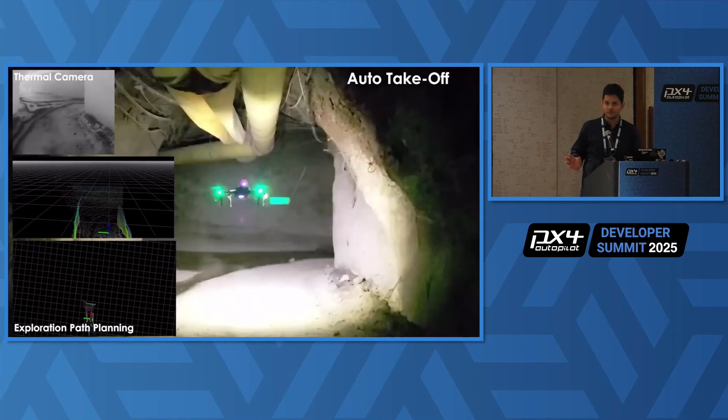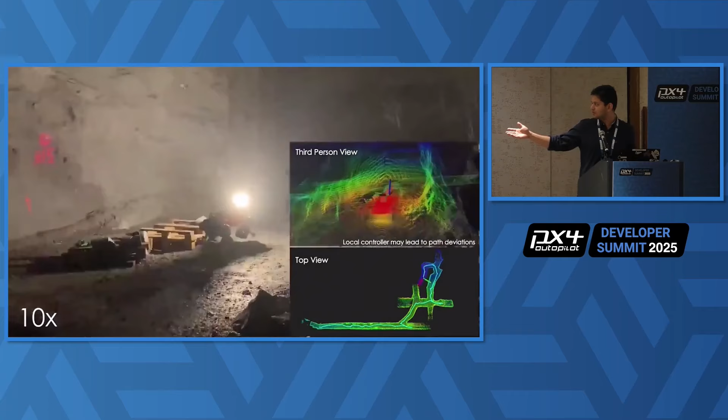And just to motivate the kind of missions that we do and the kind of environments we want to deploy our robots in, these are some representative robot deployments. This is from 2018, where we had a DJI Matrice robot autonomously exploring underground tunnels, caves, mines, essentially GNSS-denied confined environments. This is the same application, but with an ANYmal robot that we had partnered with ETH Zurich for.

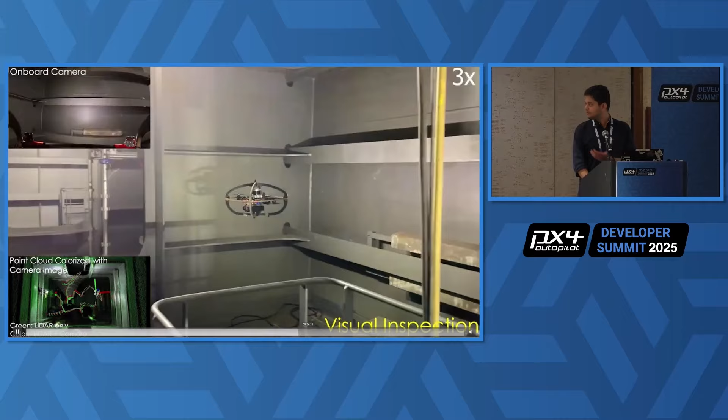So this was research that was done in the context of the DARPA Subterranean Challenge. The clips you see currently are actual deployments from that challenge, which our team won. So these are some of the environments that we care for and we want to operate in and want to develop resilient autonomy for.

And what's the challenge? This is the starting point of my talk. So we worked a lot towards having resilient systems that worked well enough in these environments, but then there were still some problems. They were not sufficiently resilient. What had happened was that the development in this field of autonomy has happened based on the sense-think-act paradigm, where typically you see a compartmentalized development of modules.

Initially there's a SLAM framework which takes in data from the sensors, gets an estimate of where the robot is in the environment, a dense mapping solution that builds representations within which a path planning algorithm then plans what the robot should do next in order to achieve its goal, be it exploration, be it inspection of surfaces, be it any other user defined objective. On the planned path, motion control happens to smoothen the path, and a low level controller then tracks this with finally the actuator commands.

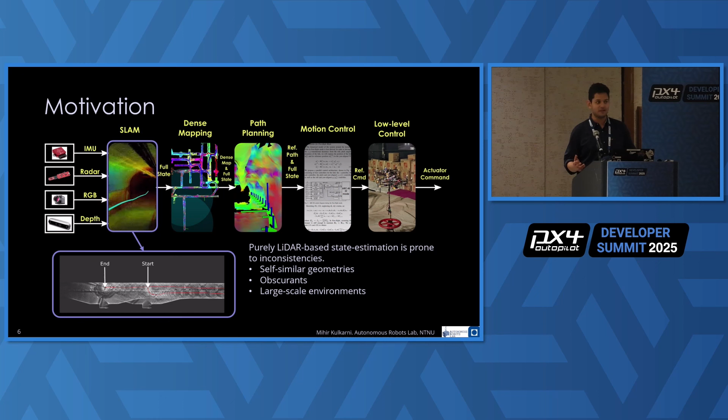So, what's the challenge with this? The development of these modules had happened, at least in our case, in a way in which each of these modules depended on the other ones being correct all the time. So in the case where the SLAM module failed, purely LiDAR-based state estimation methods are prone to inconsistencies. They drift, they struggle with self-similar geometries where they cannot localize well. They struggle where there are obscurants in the environment, such as smoke, dust, particulate matter. And naturally, they have some sort of drift in large-scale environments.

Because of this, dense mapping also struggles because hard to perceive obstacles such as thin branches, twigs, wires, cables, etc., are not mapped, because the mapping resolution is directly related to the available computation on board and memory. And the drifting state estimates also cause an inconsistent map, through which if a planner plans paths assuming a map is free, it may not be, and the robot might try to go through an obstacle. And then the control has to work with drifted and incorrect state estimates, which is in itself again a problem.

So we wanted to propose an evolved approach where we interleave these layers in a manner that each layer tries to perform the best it can, and the layers that depend on it don't assume that the data coming in from, let's say, upstream is always correct. So they are resilient to errors, failures of state estimation, errors in the planned path, and so on. So what do we need to achieve this? We realized we needed two things. We needed good tools, and we needed good methods.

So in this talk, the first focus is on vision-driven learned navigation, which is able to enable local safety for the robot to go from point A to point B, despite erroneous state estimates or erroneous paths or paths going through things. So for tools, we needed fast, accurate simulation, versatile rendering to simulate the sensors, and the ability to support diverse platforms. On the side of methods, we need methods for safe navigation and control. We need better multimodal sensor fusion so that the SLAM module itself operates well all the time.

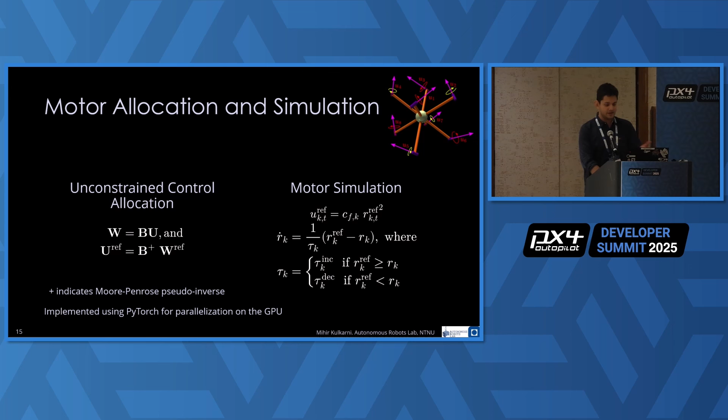And this is how the entire simulation pipeline goes: the physics engine provides the robot state, geometric controllers use the state and the user-provided or an RL algorithm-provided set point command, provide a wrench that is then distributed to thrust commands, motor simulation is performed, and this is applied back into the physics engine. So this solves the physics and control aspect of our proposed open source simulator.

We also have a customized rendering framework that's based on NVIDIA Warp, where we are able to do very fast raycasting. So Isaac Gym has already provided a rendering engine with their simulator, but it was too slow for our use, and it was also closed source, so we didn't know what was happening under the hood. So with our implementation, we are able to get about an order of magnitude speed up compared to the closed source solution provided with the physics engine.

So for doing this, the environment is represented as a set of triangle meshes. The vertex information is consolidated into a list, and the states of these meshes in the physics engine, that's NVIDIA's physics engine, and our custom representation are matched such that we can perform raycasting. With that, we're then able to simulate sensors with custom fields of view, custom projection models.

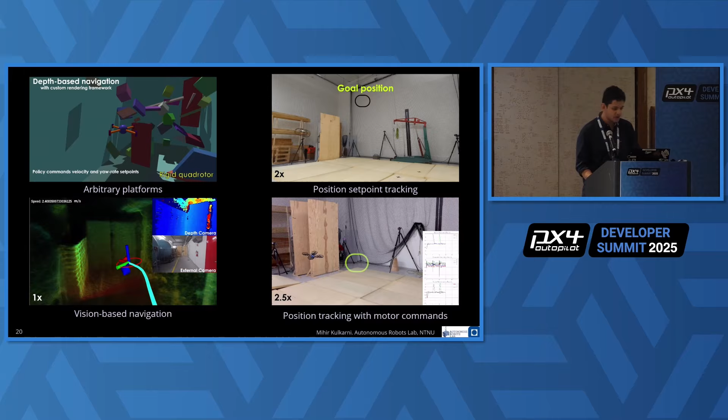With this, we have a simulator ready that we then use to train policies for navigation, set point tracking, for vision-based navigation, and also for low-level motor control to track positions. All of these methods are trained on the simulator, and they are deployed on real-world platforms so that we have a very good sim-to-real transfer process.

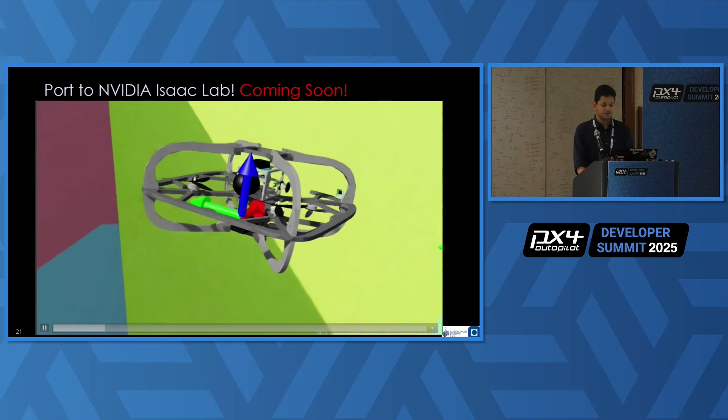The process for training each of these policies is also open sourced. So if you check out our repository, you'll be able to reproduce these results. And we're also porting the features of our simulator to be compatible with the newer and currently supported Isaac Lab, and this is going to come soon.

So with this in place, we also wanted to try to use our neural networks directly on PX4. So this is generally the PX4 standard control cascade, where we have position controller, then attitude rate controller, and a mixer. So we take out this block and we replace it with a neural control module. And this is just an inference script that runs on the embedded PX4 platform.

So we're training a multi-rotor in simulated environments, converting them to formats that can be flashed onto embedded autopilots, and then we validate on real hardware. So this is an example of the embedded PX4 neural mode running. And this is also contributed as an experimental feature to, I think, version 1.17 in PX4. So you can try it out. You can train your own neural networks for robots in Aerial Gym and deploy them on your platforms.

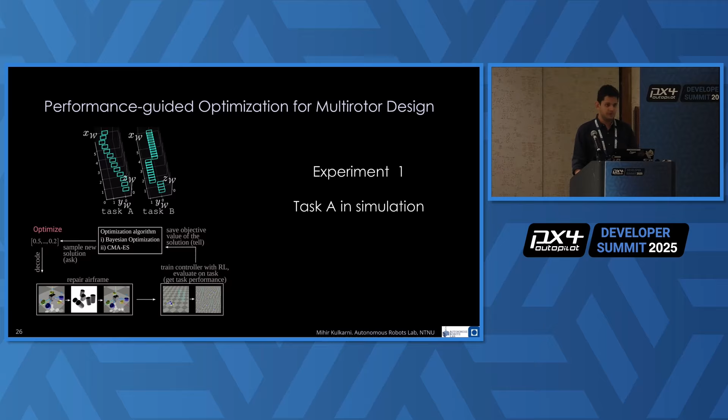So with this, we wanted to go a step further. We also wanted to see what we can do in terms of robot design. So we have very fast simulation, but can we also improve designs of the robots that are doing certain tasks? So this was led by a postdoc of our group, and we defined that for this problem we had two tasks of interest for us.

The first, task A, was a set of gates that are minorly deviating from each other, and task B was a distribution of gates with a certain profile where most of the gates are one behind another and then they suddenly change. And we wanted to see if we can evolve designs that outperform standard airframes for each of these tasks. So the method proposes that we use a Bayesian optimization for airframe parameters.

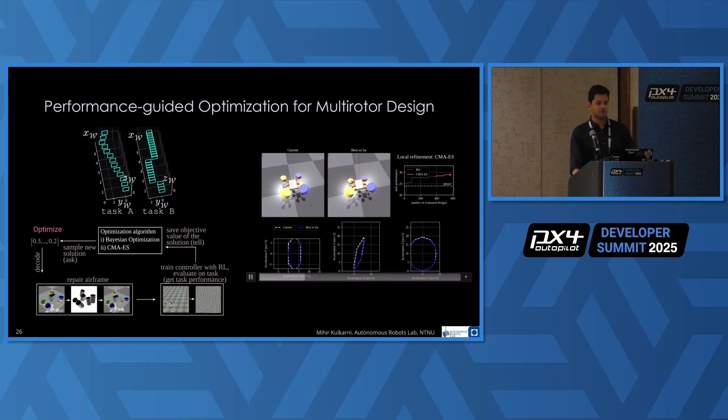This is then trained using a neural network policy to complete these tasks. And then we evolve designs and train controllers for them such that we're able to optimize for the task at hand. So this is an example of various designs being simulated together for the task A at least.

For the task B, which was a bit more extreme, we actually built the design that we evolved, and this is how it performs in the real world when we deploy it. The dotted line here in the graphs is that of the simulated robot for the same mission, and the solid line is for the real robot, and they're pretty close to one another.

So moving on, from the tools side, we now have a reliable simulator. We have ways to get neural networks on embedded platforms. And we can also change our robots to optimize them for the tasks at hand. Now we move on to the methods that we want to develop to enable safety on the robots.

So what do we want to do? We want to have collision-free flight in cluttered environments. We want to reduce reliance on maps and reduce reliance on accurate state estimates, as they may be erroneous. We want to be robust to real-world sensor noise, have good Sim2Real transfer, and generalize across diverse environments.

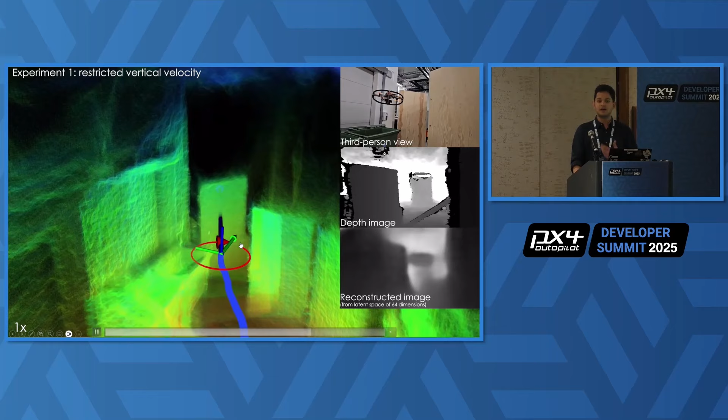This is then put in the Aerial Gym simulator, and 1024 parallel environments are used for training an RL policy. And we simulate noise and disturbances, match the response of the controller, and so on. And this is the result that we get. We now have a policy that is able to navigate these environments when it's provided a vector to the goal location, the current state, and the depth image. And then it's commanding velocities and yaw rate to the robot such that it can traverse this environment, and it's quite robust to the real world sensor noise.

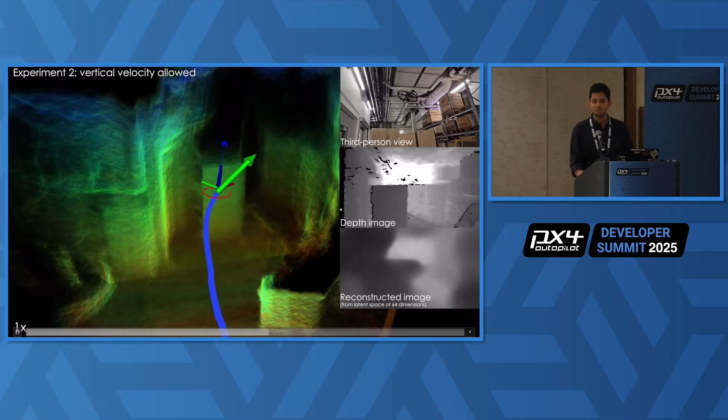This experiment actually was a bit of a deviation from the training because we restricted its vertical velocity, which was not how it was trained. So when we don't do that, the robot takes a more natural path to, in fact, go over the obstacles, and a more reasonable and a safer path to the goal location. So the policy is also robust to these kinds of changes during inference, and these are not what it was trained for.

In addition to this, we have also open sourced our work with composite CBF based last resort safety that provides certifiable safety to the platform. It's a CBF based control layer where user provided acceleration commands or algorithm provided acceleration commands are corrected by the safety filter such that the robot is necessarily commanded to a safe region in the environment.

We now come to improving the state estimation and the planning side of our autonomy stack. So as discussed, we have quite some challenges with self-similarity because the LiDAR-based methods have failed or have a significant drift. A lack of visual texture is, of course, a problem for vision-based estimation, and obscurants such as smoke or dust don't help. So a new method was proposed where multimodal fusion can be performed between a LiDAR, a camera, radar, and IMU, where we can produce IMU rate odometry or the graph rate odometry and also build an online map that continuously updates itself.

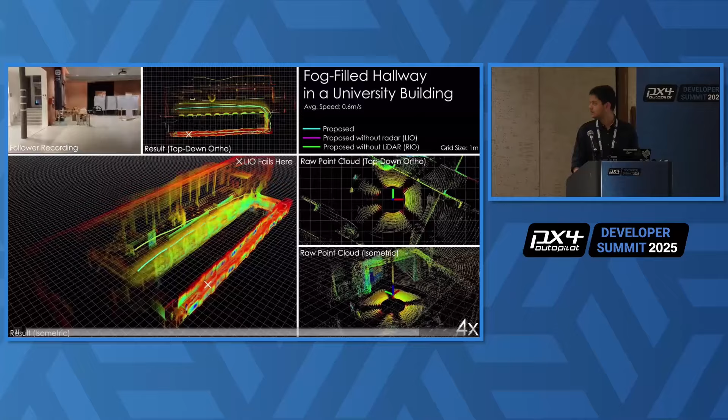But the fusion of radar in this estimation architecture helps it retain robustness, and we're able to estimate the trajectory of the robot and build a map using the data for a much longer part of the mission. And this robot now exits the smoke filled corridor and goes back to the starting location in a much clearer zone.

And then, of course, in the interest of time, I'll just briefly say that we have a universal planning algorithm across robots where we can plan for exploration and inspection for aerial, legged, and underwater robots. And this is also open sourced as GB Planner, graph based exploration planner.

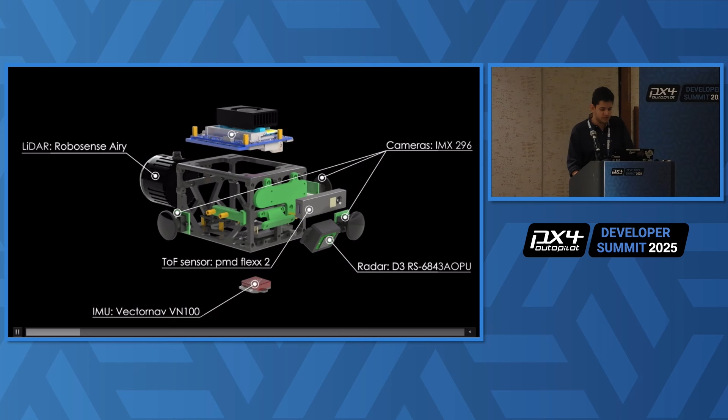This all comes together in an embodiment which we have recently released as Unipilot, where we want to enable GPS denied autonomy across robot embodiments. So we've built a module that has a LiDAR, a bunch of cameras, a radar, an IMU, a time of flight sensor, and a GPU enabled computer. This module is then deployed first on a multi-rotor, a legged robot, and a hybrid fixed wing platform.

And in this mission, you can see, equipped with this module, we are able to perform exploration of a mine in Norway, where we don't know anything about the environment before we deploy. In this part of the video, the robot with the same module is performing inspection of a ballast tank inside a ship. So this is a process that's required to ascertain the health of the ship, and this can be done autonomously using our autonomy stack.

And of course, we are also evaluating this in fast flight, where we reach up to 15 meters per second, and we're able to estimate the robot position and build a map at these speeds. And the same can be transferred to a legged robot for exploration.

And we also perform odometry evaluation using purely the radar and IMU on this hybrid fixed wing platform, which we are currently flying in a multi-rotor mode. And there is work ongoing to have radar-based odometry estimation directly on the embedded flight controller.

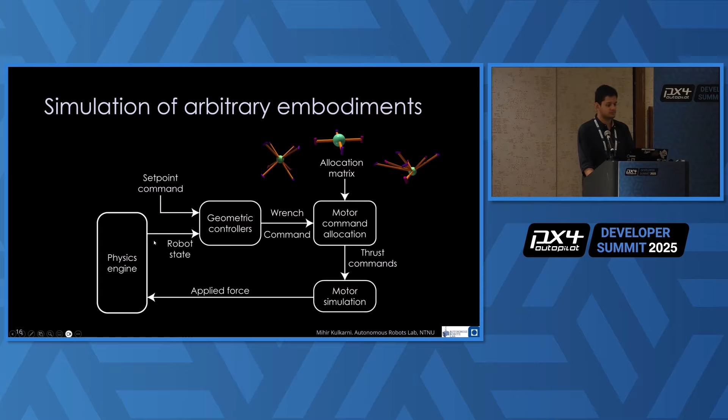All right, let me navigate towards this next person. It's you, because I remember you. So my question is, what visualization did you use for those plots at the end? And is that all real time or was that in post? Which part of the Unipilot? Like all the way at the end when you're going through the tunnels and stuff. Let me check. Like all the rainbow plots.

Yeah. These? Yeah. This is RViz and Adobe Premiere Pro for putting things together. And that's all real time? This one or this one? In this video, this was from 1.5 years ago. This was run offline, but what we have in the Unipilot video is all real time. This is from some months ago. So. This guy.

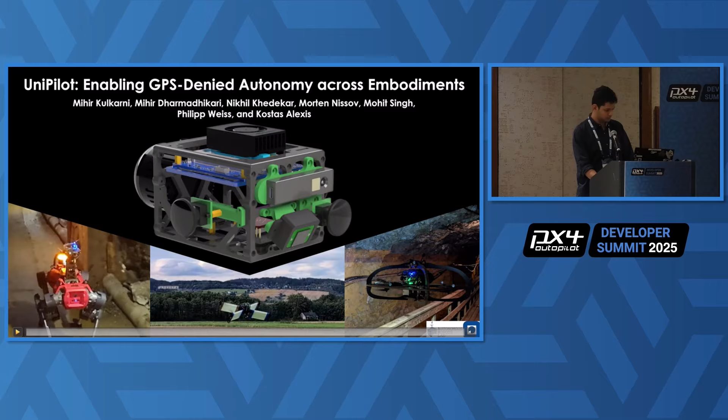We got more questions over here. Let me just change batteries here. All right, Fernando. Now that the microphone is supercharged.

Thanks for the talk. You started mentioning how we need to replace some of these traditional approaches that we have been doing with some sort of end-to-end learning system because the performance will be better. That's a story that I've heard a lot from academia. I have yet to see an example where you perform better than traditional systems, model-based systems, except for a couple of situations like racing, for instance, where you have a control

interface and your variables are not changing that much. I'm curious if you had a concrete example where these systems are performing better than traditional model-based systems.

Just to clarify, I don't personally think an end-to-end system would outperform the hierarchy of modules for complete autonomy, at least the way we are applying it. But you're bypassing. You're going from sensors directly to a learned representation that you're going to be using for autonomy, bypassing SLAM and mapping and path planning, which are the traditional cascade approaches.

So the classical methods such as model predictive control work very well on robot state, but they struggle when high dimensional sensor data such as images are to be used. This is where data driven methods such as learning based approaches from reinforcement learning or classification based methods work very well, where you are able to have

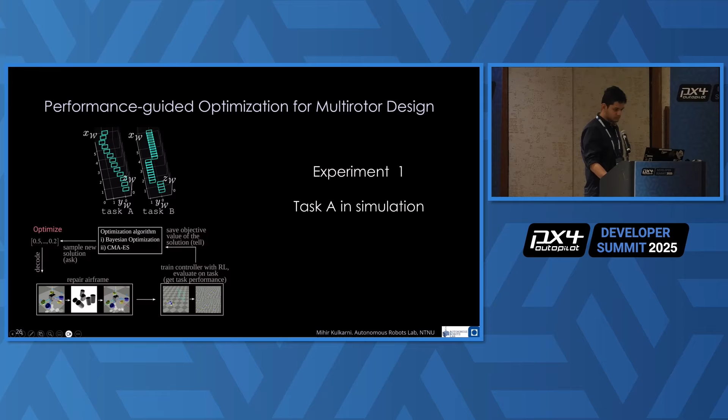As I was watching the animation, as you were going through the various configurations possible, saying what's the optimal design, that's pretty cool, right? I'm just curious, does it take into account, for example, if you have one rotor sitting in the output of another rotor, due to the loss of efficiency because of the higher velocity coming off of it? Is that a part of that sim?

Yes, the rotors for the placement were modeled as elongated cylinders, not just discs, and collision checking was performed to see that no two cylinders were intersecting. So at least the airflow below a rotor would be clear for this purpose. Cool, thanks.

All right. Think I got time for one more. Ben. Stealing mics. Thank you so much.

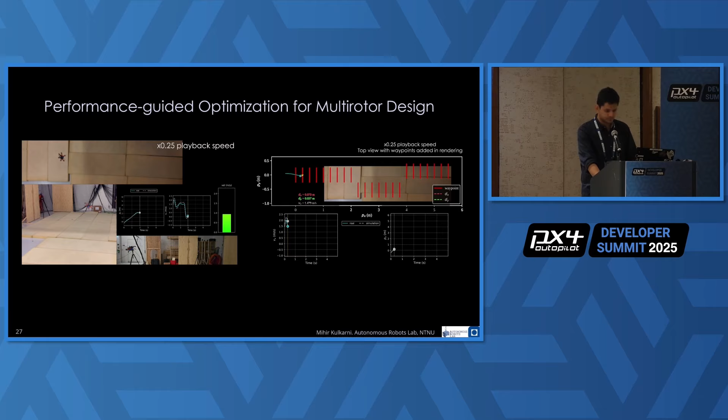You mentioned adding a module inside PX4 to actually run inference on a neural network to replace the existing control cascade. The control cascade in PX4 is running at different frequencies, so the rate controller at very high frequency, the position controller at much lower frequency. How do you match this on the neural mode? Is it running at multiple frequencies of inputs, or is it the lowest or the highest?

Can you give a more specific example? Can you repeat this with an example? When you substitute the entire PX4 control pipeline with your neural network, basically, what is the input and at what frequency is it running? Is it running at the output of the odometry topic, or are you taking the high frequency vehicle rate, vehicle angular velocity topics and mixing them? Is it multi-rate or is it single rate?

So in this case, we have one neural network which replaces these three modules. For the offboard mode example, we replaced whatever was in the offboard mode with a neural network. So at the frequency at which it was called, the neural network runs at that same frequency.

Just to give a number, the inference of this neural network on a ModalAI/mRo PixRacer Pro unit takes about 100 microseconds. So it's not so expensive. It's not that different from the control loop that was already running for the offboard mode with the classical approach. Thank you so much.